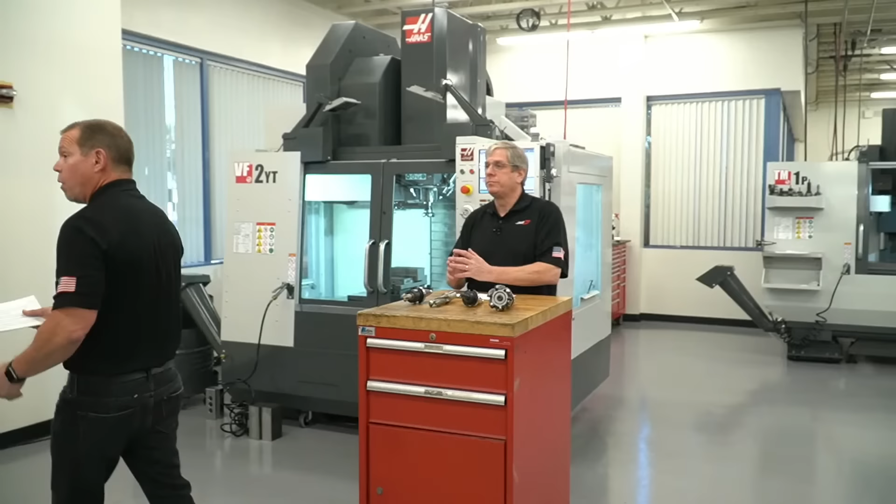Have you watched any demo days? I think you've been in every single one of them. The how a UMC is built one, I wasn't in. Yeah, you missed one.

You've been with Haas for about 20 years, next month 20 years. And 12 of those were in an applications role, for 12 years I was either an applications engineer or managing that applications department.

How many times have you heard people say Haas can't cut steel? Yes, that's how you all sound in my head. We have definitely heard that before. The applications department is responsible for helping Haas customers use their machines, and a lot of people have contacted us about trouble cutting steel on their Haas machine, but it's not because the machine wouldn't cut steel, it's because they weren't running at the correct parameters for that machine. There's a mini mill with a 7.5 horsepower spindle versus this VF2YT with a 30 horsepower spindle. There's a big difference, this has 3 times the torque that machine has. You can't take the same cut in steel on this machine as you can on a mini mill.

It's that simple. And the last demo of the day, we're actually on a 60 horsepower machine, even a step up from here. We were talking a couple weeks ago about a customer that had a 3 or 4 inch shell mill on a tool room mill trying to take a massive cut, and he couldn't figure out why the machine wouldn't do it. You've got to have the right machine for the job.

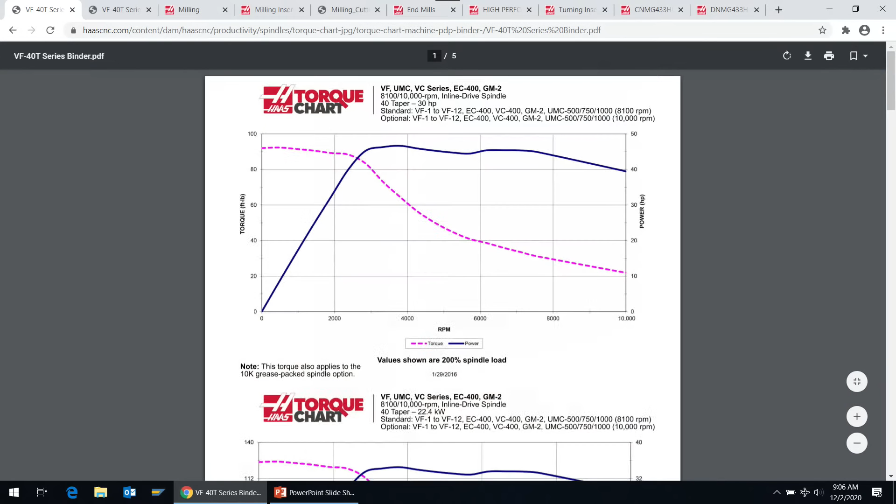They're very easy to see. I've got it pulled up here if you want to take a look at it, Frank. So we've got the VF2YT here, same machine that you guys have got over there. If I page down a little bit and go to the right, I can see this torque chart. I'll just click on that, and there we go. Actually, I'm going to bring up this version here because it's a little blown up. Same chart—here's the torque chart for this particular spindle on this machine.

Along the bottom is the RPM. This is the first thing you need to find on the torque chart—what RPM are you running at? The blue line here is horsepower. At very low RPMs, there's not much horsepower at all, because it doesn't take a lot of power to get the spindle turning at 500 or 1,000 RPM. But what it does take is a lot of torque. So we can take that power we're not using to make the spindle rotate quickly and turn that into torque. We have maximum torque at low RPM, shown by the dotted line up here.

You can see our maximum torque on this particular machine is right about 90 foot-pounds. The foot-pounds are listed on the left-hand side of the chart, the horsepower values are listed down the right side, and along the bottom is RPM. So you find your RPM and see what torque and horsepower you have at that speed. Don't forget to verify the machine models and the spindle type at the top of this torque chart.

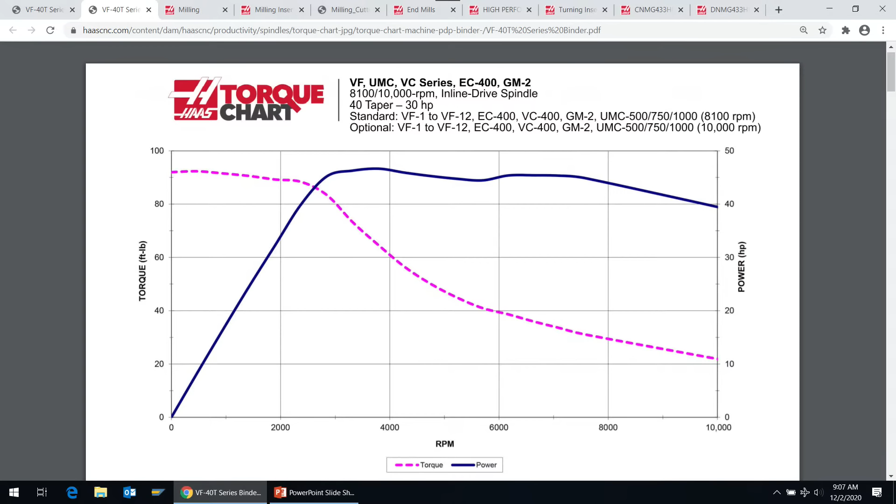On the torque chart for this particular machine, the first chart you'll see is in imperial units, using horsepower and torque in foot-pounds. But if you scroll down one, you'll get the metric version, where we have power in kilowatts and torque measured in Newton meters. So that's the difference between those.

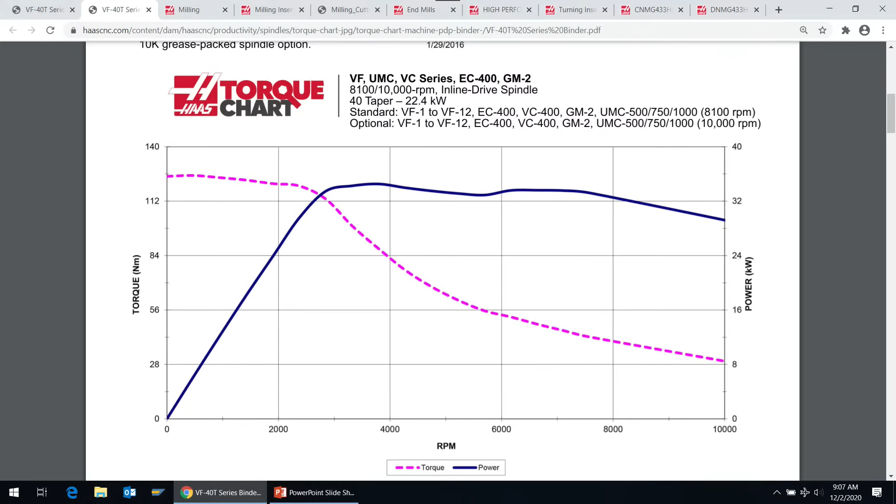If you go down again, you'll see the torque chart for this machine with a gearbox. We have two sets of torque and horsepower lines here—one set is the low gear values, the other set is the high gear values, and you can see where the shift point is. If you're really doing heavy cutting, you may want to consider a gearbox machine, because you can see you've more than doubled your torque at low RPM. This machine without the gearbox is 90 foot-pounds of torque peak, and this machine is 250 foot-pounds of torque—quite a bit more.

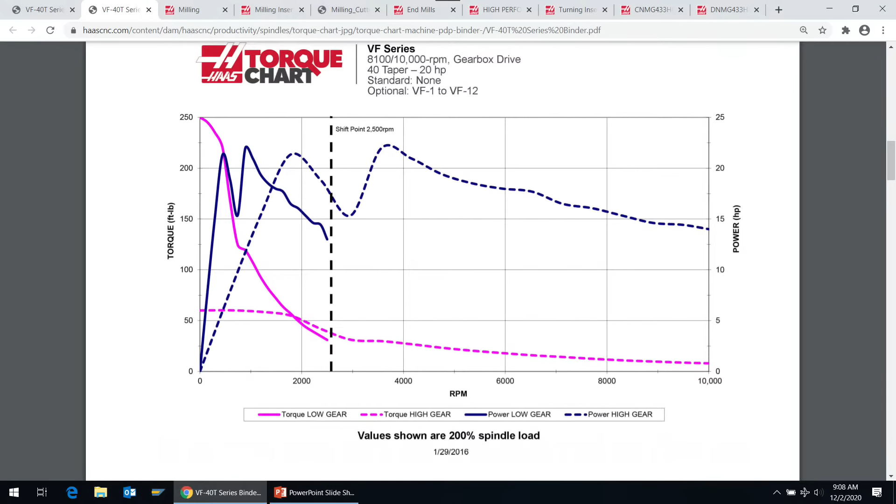If you're cutting hardened materials, tough materials like stainless steels or titanium, you definitely want a gearbox machine. It doesn't mean you can't cut those materials without a gearbox, just that you can't cut them as efficiently. After our demonstration, we're going to measure the spindle load values of each of the cutters, and then go back to the torque chart to show you how those values relate to the torque and horsepower curves.

The other thing we're going to do is go through each tool. Each of these tools is from HaasTooling.com. So we're going to talk about feeds and speeds. Andrew, do you mind pulling up HaasTooling.com?

From the website, if I go over to the right side of the screen and hover over Haas Tooling, this gives access to all the various menus for the different kinds of tooling that we sell. I've already clicked on the milling section, and I can see milling bodies, inserts, end mills, all that sort of stuff. I've got another tab open.

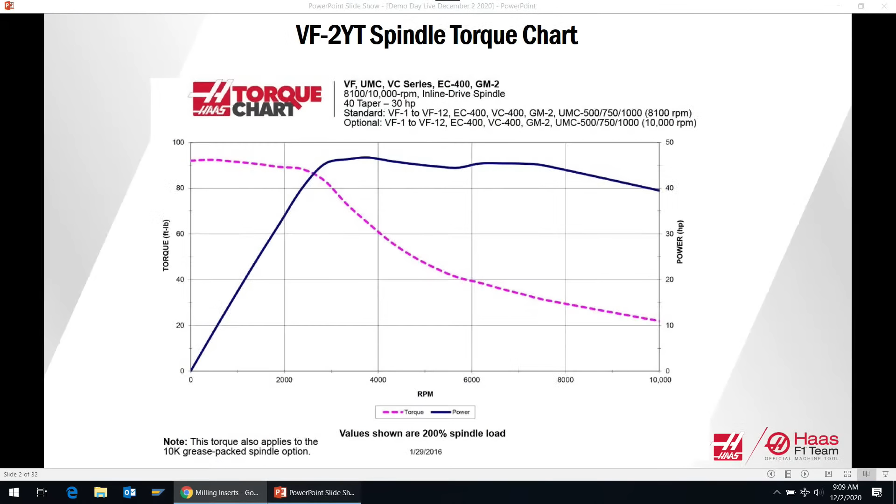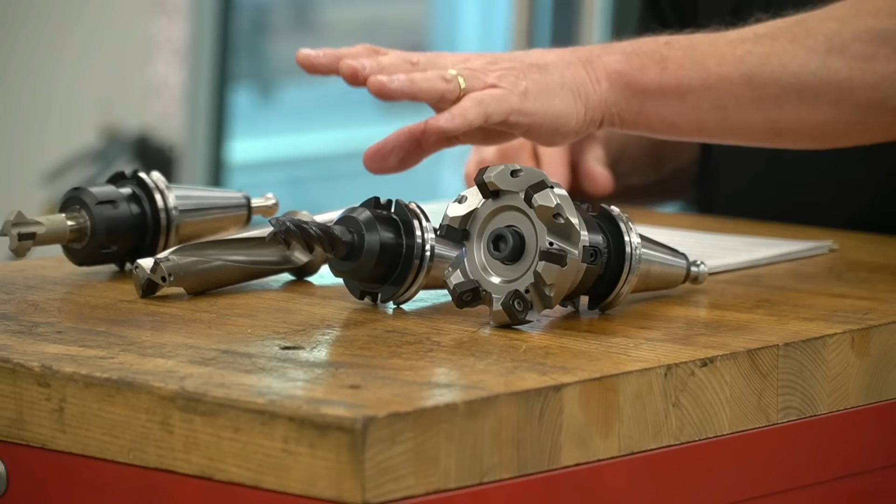You can see I'm cutting an alloy steel here. I'm using the HMP 35 inserts, which are the preferred grade for steel. I've programmed it at 850 surface feet, right in the middle for a spindle speed, and the feed per tooth is just under 10 thousandths, again right in the middle of the recommendation. The point is to show you that if you get these tools from HaasTooling.com and plug in the numbers, if you got all the parameters right, you're going to be right in the ballpark. You'll be able to make those cuts, assuming you've got the torque required.

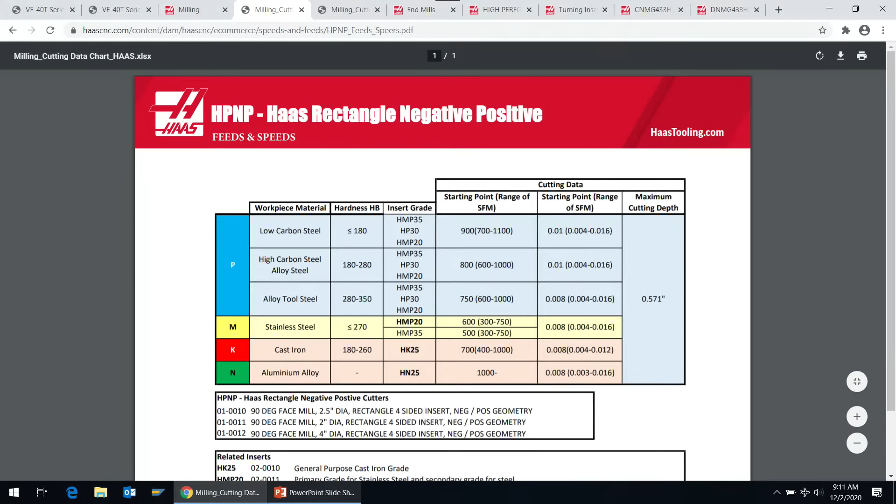So here's the insert page, and down here you can see technical specs and stuff like that. But what I want is the speed and feed—it's kind of hidden away here. If I click on this, it brings us to the same chart that John was just showing, except John's version is highlighted with the actual values he's using. You can see it's just a couple clicks away to get the information you need.

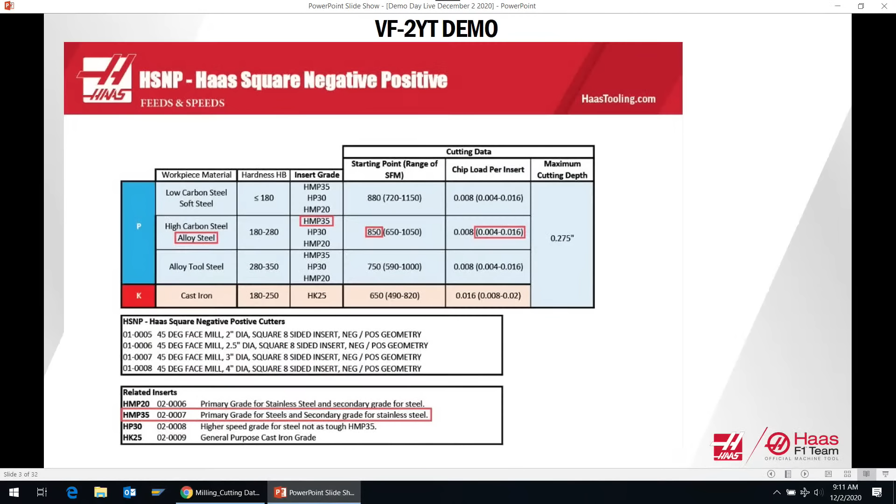Okay, back to you, John. So the second tool in this program is the 3/4 inch 4-flute end mill. This is the standard length end mill, 4 flutes. The surface footage I programmed is 575 surface feet and 4.4 thousandths feed per tooth. On the depth of cut, we're going nice and deep at 1.5 times diameter, and I'll talk more about that when the actual tool is running.

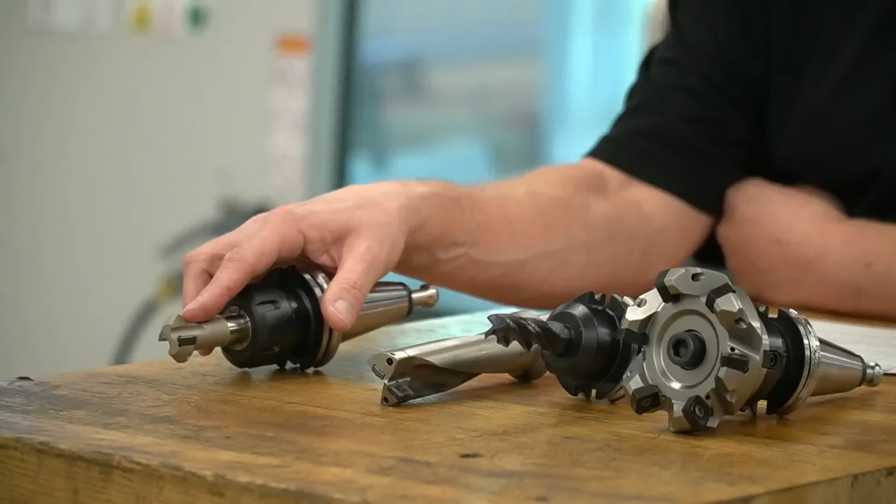The third tool in my program is the drill. This is a 1.25 inch inserted drill. We're using TSC on this one. We programmed that right at 540 surface feet per minute, feeding at 6.1 thousandths per revolution. The last tool is the chamfer tool. I've got the 2-flute 45-degree chamfer tool here. This one's programmed at 800 surface feet, quite a bit faster. It's taking a much smaller cut, and we've got 7.5 thousandths feed per tooth for those 2 teeth, just to put a 50 thousandths chamfer on all the sharp edges on this demo program.

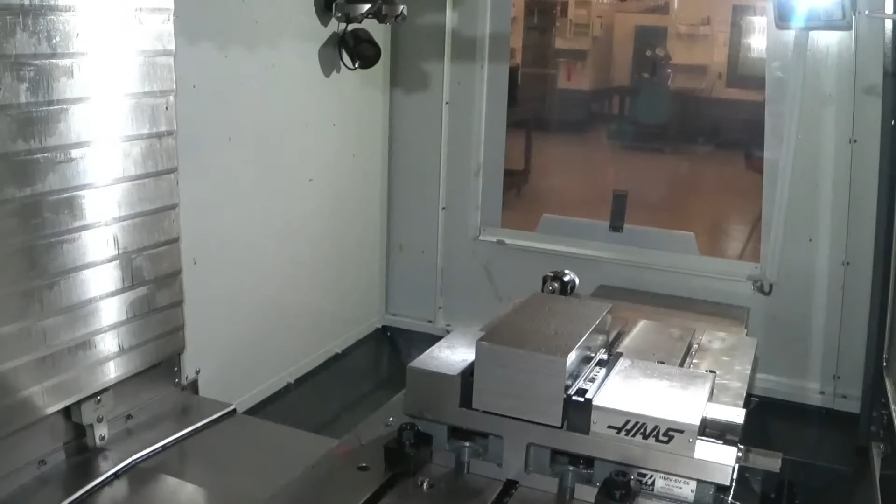Okay, are we ready for the demo? I think we are. Tyler, you want to come in and we'll get you in here tight? We've got a camera inside the machine. I'll mention one thing real quick: in the demo program, I used a macro statement to zero out the spindle load meters for each tool before they run, and it records the maximum spindle load that tool achieved during the cut. All of that information is being printed to a file, and we can take a quick look at that at the end of the demo, then relate that spindle load information to the torque chart next.

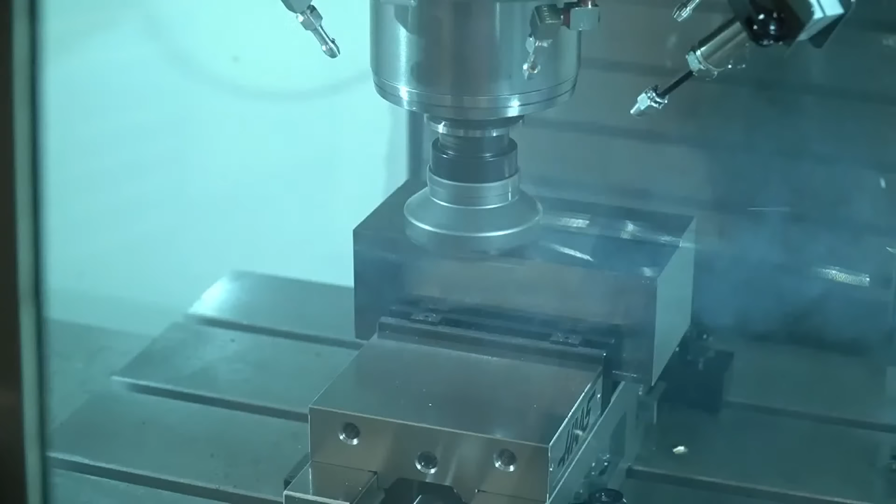This cutter's coming in. It's taking 150 thousandths depth of cut and a 2-inch width of cut. My spindle load meter is hovering around 130.

You can see the chips coming off are nice straw colored, and as they hit the pan, they turn a little bit blue. That means we're cutting just perfectly.

Here's the end mill. This is a 1.5 times diameter deep, so 1 inch, 125 deep. And I'm taking 33% of the diameter as width of cut, which is 250 thousandths on that 3/4 inch end mill. So 1 inch, 125 deep, and 250 width of cut. We'll take a couple of cuts.

Again, you can see the chips are coming off straw colored or a little bit blue, and when they hit the pan they turn real blue. That means all the heat in the cut is coming out in the chip. This thing's cutting really well.

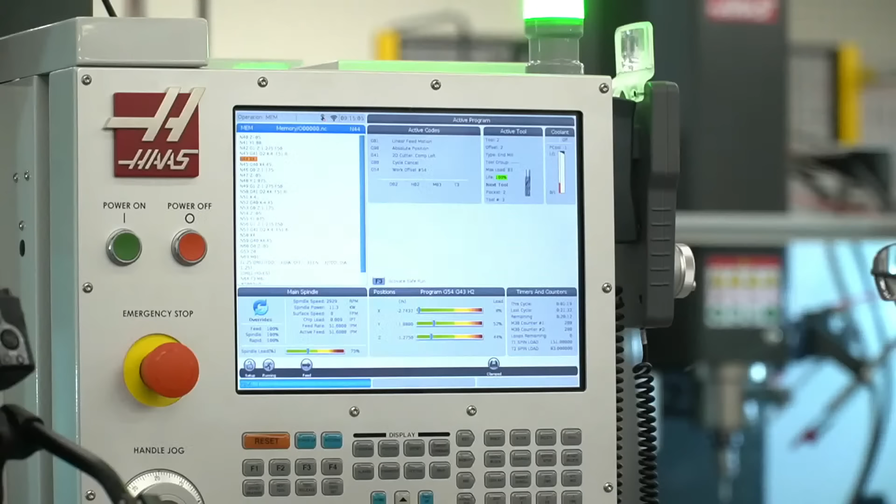And what kind of spindle loads do we have? Spindle load is 75%. Okay, so you've got some room if you want to push it a little bit. I could increase my width of cut and take a bigger spindle load because I've got the headroom there. Let's do a little cleanup pass here just to make it look nice.

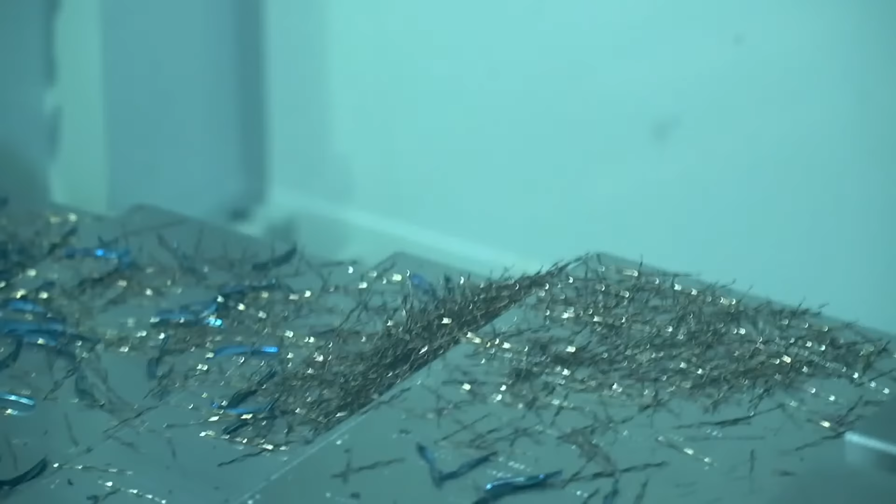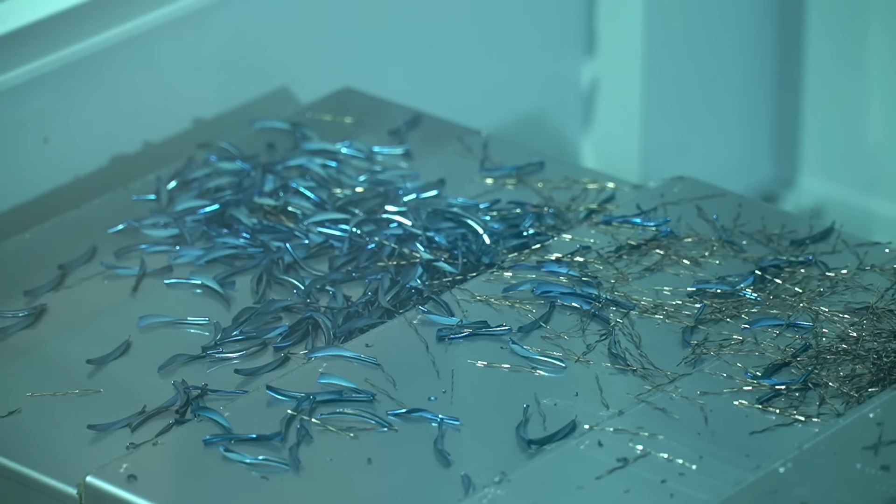I was wondering if you could get a shot of the chips over there on the way cover. I'll feed hold this. You can see the color of the chips, how they're nice and blue. The thinner chips, which didn't carry as much heat out, are straw colored, and then the bigger, thicker chips have turned blue because all the heat in the cut has come out in that chip and not in the workpiece or the material. Okay, I'm going to focus back on our part and I'll continue.

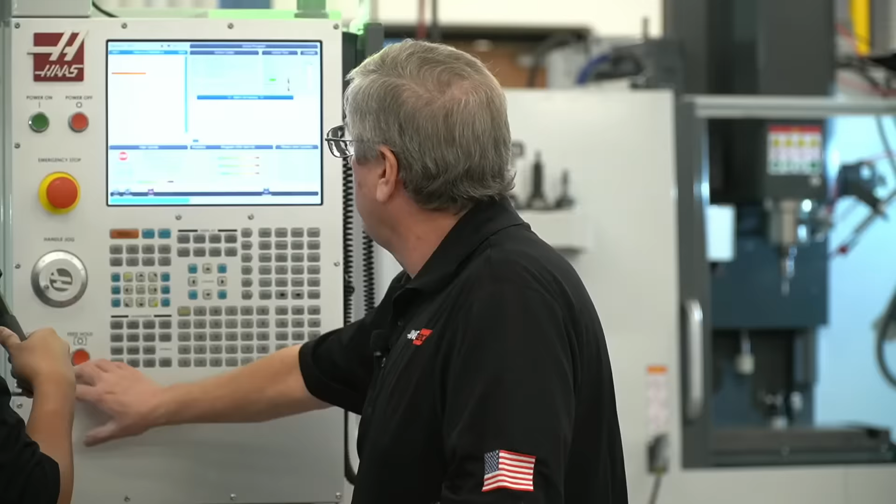So that's a 1¼ inch inserted drill going through 3 inches of material. My spindle load is 95%. It's fluctuating a tiny bit right around there, but that's perfect. Right at 100%, 110%, 120%. We can do that all day long with that tool.

And you definitely want through spindle coolant with this tool. You've got to get those chips out of there. Yeah, definitely. Unless you're doing a very shallow hole, you've got to have through spindle coolant with these insert drills.

We'll toss 3 holes in there. So one of the things we talked about was spindle load, and you say you feel comfortable running that all day long. It's always a balance, right, between tool life and how fast you're removing material?

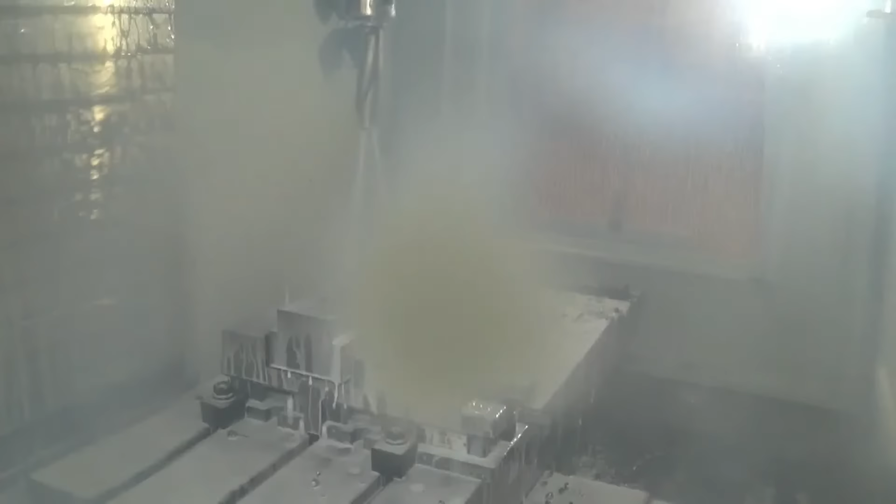Yeah, absolutely. So with regard to spindle load, the vector drive on Haas machines will allow you to run below 150% continuously, all day long in that cut. At 150%, we can go continuous for about 30 minutes before we run into trouble with maybe overheating the spindle motor. And even if you bury this thing at 200% spindle load, you've still got about 3 minutes of cut time to get away with it. So there's still plenty of headroom utilizing the vector drive in our machines.

But at some point, you're going to be compromising tool life, right? Yes, absolutely. You don't want to push things too hard, not because the machine can't take it, but because the tooling can't take it. The last thing you want, if you make parts for a living, is a catastrophic tool failure because you lose the tool, you lose the part, it's a mess.

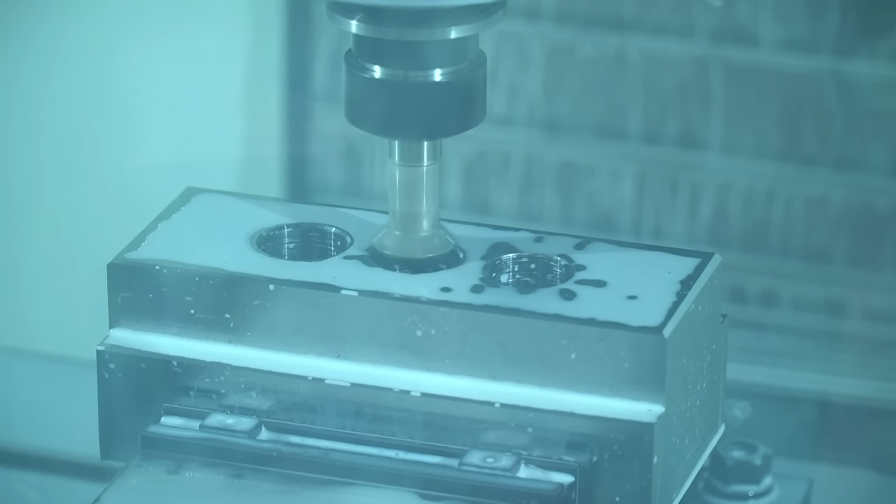And so reasonable spindle loads for your cut and your tooling, in my opinion, hover around 100, 125%. I wouldn't try to go too much more than that on a regular basis. Backing off of there is definitely going to give you longer tool life. And it's not that it injures the machine or anything, it's more about the tooling.

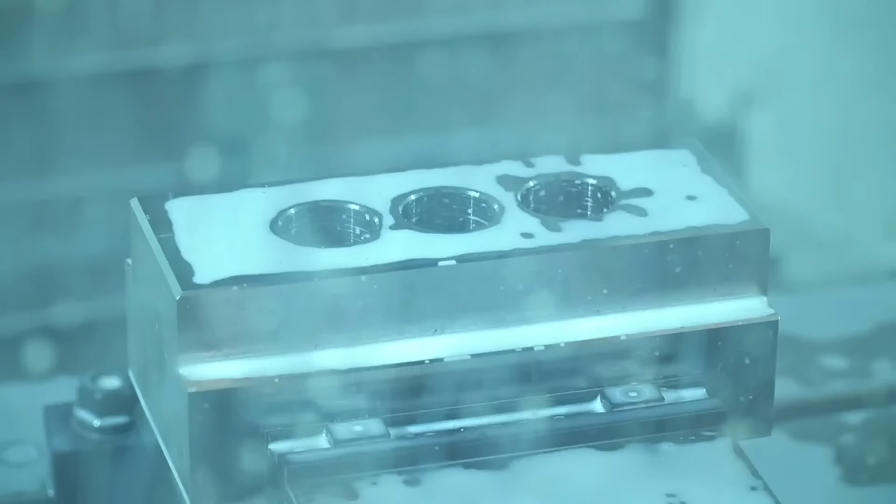That's right. When I used to, in my previous role here, go to a lot of customer shops, guys would be running their machines at 30, 40% spindle load, thinking that was going to make them last longer. And yeah, it probably did, but you're leaving money on the table for sure. The extra cycle time it takes to machine at those lower spindle loads is costing you money. Exactly, for sure.

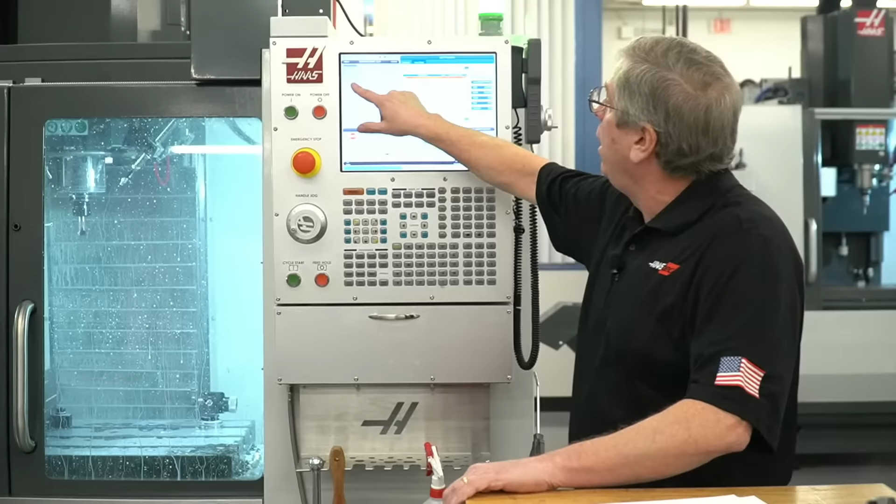So I wanted to take a quick look. I'll show you the DPRNT file here that I created. So at the end of this program, I wrote the maximum spindle load recorded by each tool.

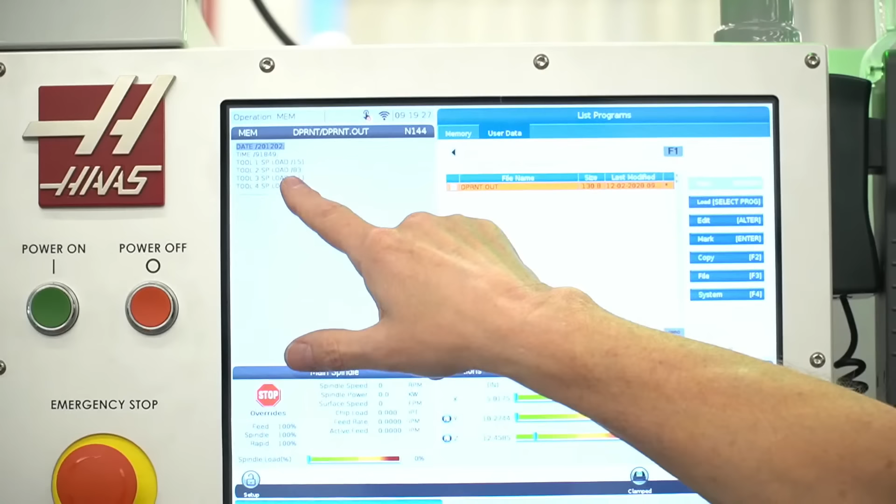Tool 1 had a maximum load of 151%. Tool 2, which was the 3/4 inch end mill, did 83% at a maximum. The drill was 111%, and our chamfer tool was only 5% spindle load. So you get an idea of where those loads came out, right? 150 for the face mill, 83, 85 for the end mill, and then 111 for the drill.

Now let's pull up the torque charts and see how that information jives. Let me scoot over here just a little bit.

When we were preparing here, I recorded 155% spindle load on that face mill the first time through. You can see that the maximum torque is up here at 90, and that's 200% spindle load. The values shown for horsepower and for torque are at 200% of the load of the spindle motor.

So our cut was 155% of that spindle load. When I take 155 and divide it by 200, I get 0.775, 77.5%. That's my conversion factor. So at the RPM I was running, 1,082, I have right at 90 foot-pounds of torque. So 90 times 0.775 gives me 70 foot-pounds of torque. That's the torque value that I pulled, 70 foot-pounds at 155% spindle load.

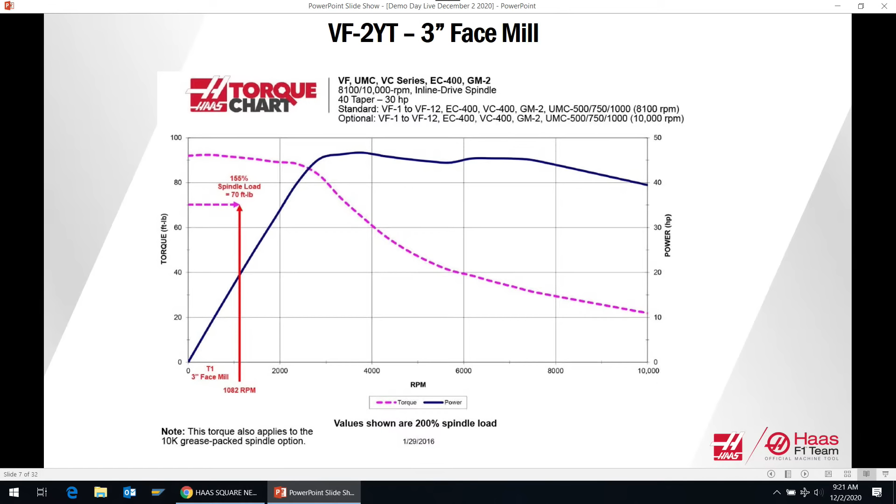Now let's pull up the next chart. This is the 3/4 inch end mill, running at 2,929 RPM. My torque value is a lot lower here because the chart has come down, so at this RPM I have less available torque. I pulled 84% spindle load and did the math on that, and that showed me that end mill was requiring 35 foot-pounds of torque, and this is where that 35 foot-pounds falls in. Remember, this is my maximum, not that, when I'm making this calculation.

And then the last tool. So you actually, in this case, had quite a bit of headroom in terms of running that tool harder, but you probably don't want to run it that much harder.

Right. In that case, I was taking 250 thousandths width of cut and 1.5 times diameter deep. I would ease that width of cut in if I needed to remove more stock per cut. That's how I would utilize the available spindle load that I have on that tool, and I'm probably not going to harm that tool or cut its life down at all by increasing that width of cut.

When we were preparing for this, you were talking about how one of the things you like to do, if you're unsure about what spindle load you want to use, is start light and then see where that puts you, and then do the calculation.

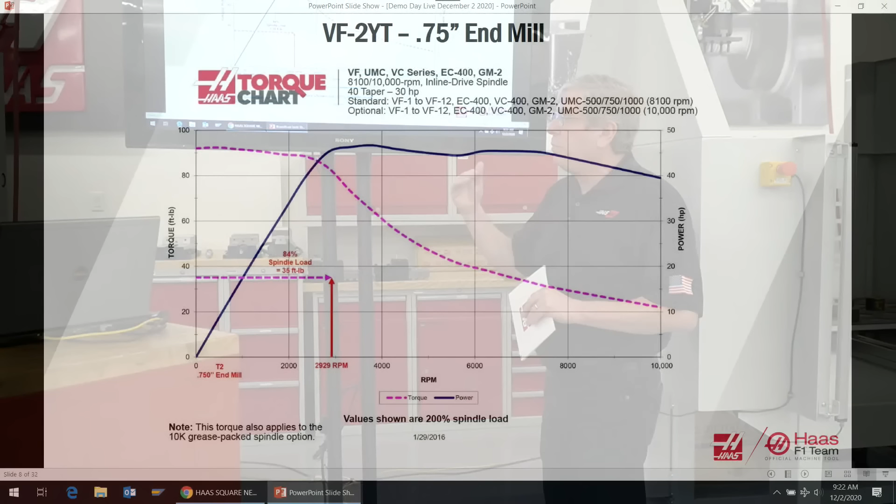Yeah, absolutely. So the way I would approach it if I was unsure about the cut I wanted to take, I would get the speed and feed information for the cutting tool and use that right in the middle of the speed and right in the middle of the feed rate information, and then go ahead and take a light depth of cut. Set up your cut with the width you want, but take a lighter depth.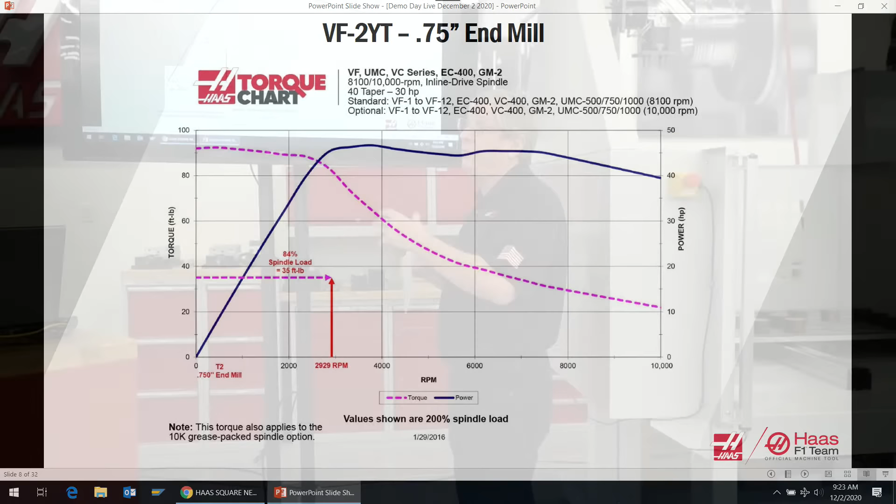For example, let's say you took that light depth of cut and you had a 50% spindle load. Well, if you change one cutting parameter, like depth of cut only, you can double that depth of cut and your spindle load is going to double. So you go from 50% spindle load up to 100, so you can take that cut twice. You take twice the original cut, you're going to double the cut, it'll double the spindle load on you.

So that's how taking a light cut, monitoring the spindle load and seeing how much available torque or headroom you've got on spindle power, and then go from there as far as adjusting and optimizing your cutting parameters. But definitely go with the recommended speed and feed and adjust your cut parameters as far as depth or width of cut.

Right. It's just a practical, empirical way to quickly get to a good value without maybe doing some involved power calculation or something. You just start off at the recommended values and change depth of cut.

There's also milling and turning calculators on the control where you can punch in your numbers and it'll give you a rough value for required power based on what material you choose on that calculator.

Right, okay, so third tool. The third tool here was the drill. We can see that was running at 1,650 RPM, where we're back up in our maximum torque range, but we pulled 110% spindle load. 110% divided by 200 gives me my percentage, which I multiplied by the 90 foot-pounds, and the percentage was 0.55.

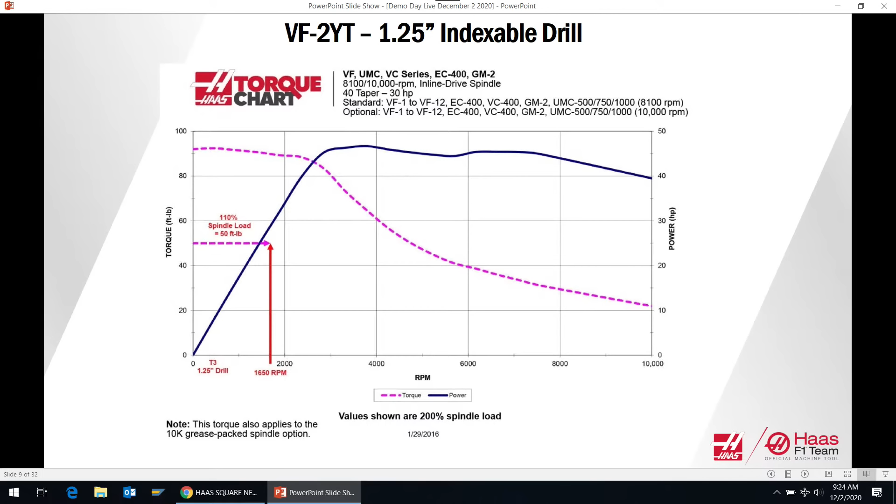So 55% of 90 foot-pounds of torque is 50 foot-pounds of torque. That's what that cut pulled, and I was definitely right in the sweet spot for that tool at 100%, 110% spindle load. That's how you translate the spindle load numbers to the torque chart and figure it out. You have the spindle load information from the machine, and you have the tooling information on the website or wherever you're getting your tooling, and it's easy to get started.

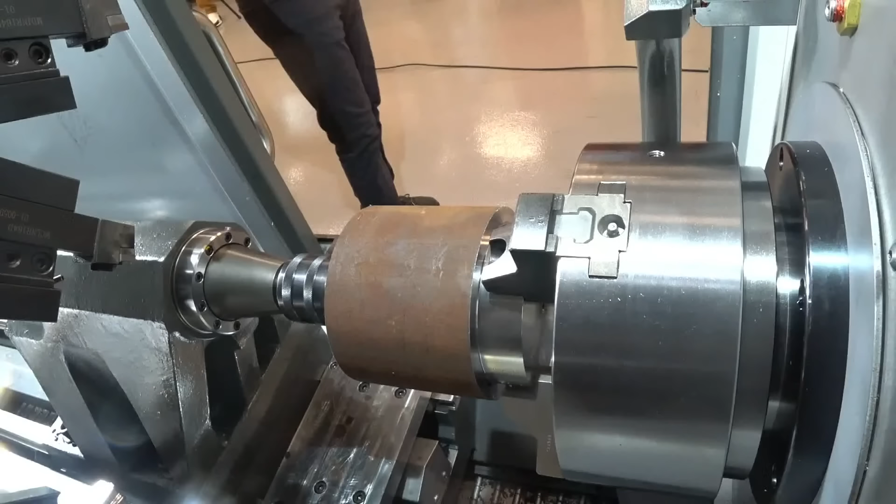Okay, so on the ST30LY we're going to go from milling to turning. Talk a little bit about what you're making. Before I do, just so you know, at Haas all the lathes are running steel about 80% of the time, so it's nothing new to us, we do it all the time over here, mill spindle shafts and lathe spindle shafts. You've been at Haas for how long? 20 years, 15 years as a machine shop supervisor, so you supervised the machine shop and specialized in turning. Exactly, so if anybody knows how much steel we turn here at Haas, it's this guy. Yeah, it's all steel for lathes.

Okay, so we're running 4140. We're doing some simple turning, the blueprints come up on the screen. You want to look, Frank, want me to change over the first tool? Let's go to the first tool. Simple, on the top left it's showing the tooling path, real simple.

And we're using a CNMG 433 insert. Now the most common roughing insert in the world is probably the CNMG 432. We're just going with a bigger radius because I really want to push this insert, show it off. It's an HRH, which is a Haas Roughing Heavy insert. It might not be available yet online. On the website, the turning inserts and turning tools are just another page here on the Haas tooling part of the site.

But yeah, this is an example of a similar insert. I think the ones you're using are going to be on there next week or something. Well, if it fails now, we might not even go on. You never know, we'll see. Yeah, HRH, I'm really comfortable with it, it's an awesome insert. We only just got it in, so that's why it's not released yet. So we're going to go with that and push this first tool.

We've got 3 tools coming. Do you want to talk about the loads first, or after? Let's talk about it now. The depth of cut I'm going at, if you look at the top right graph, it shows the feed rate increasing. The bottom scale is the feed rate increasing left to right, and the depth of cut is increasing from bottom to top. The red ring shows where I'm cutting this, and it's at the extreme end of this insert.

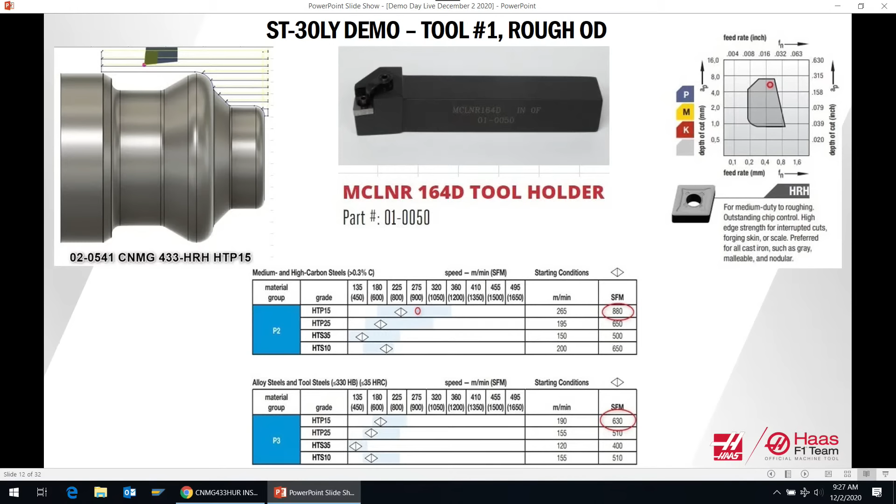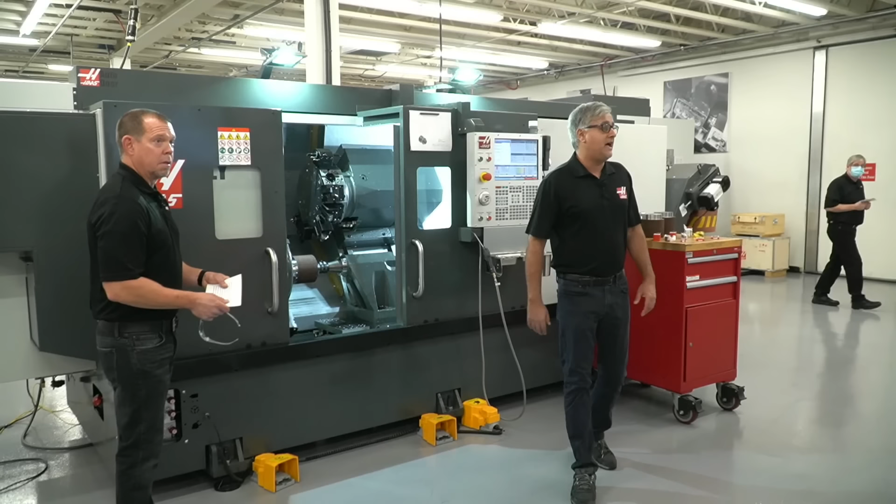So we're cutting, you're definitely pushing this hard. We're at 200 thou depth of cut, probably 18 thou feed, and the spindle speed recommended for 4140, which is an alloy steel, the bottom graph shows it's 630. We're actually going to go with a high carbon, we're going to go with 880, so we're pushing this beyond what you're supposed to, just to see some really good chunky chips basically. All right, let's do it.

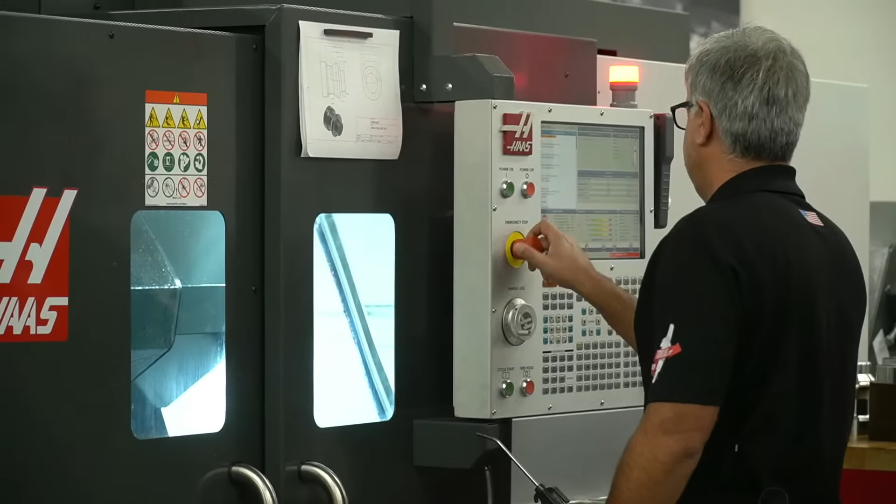Sal, you want to come in here before he starts? Yeah, before you press go, let's make sure. You've got that action cam, but I think Sal's shot is going to be the best here.

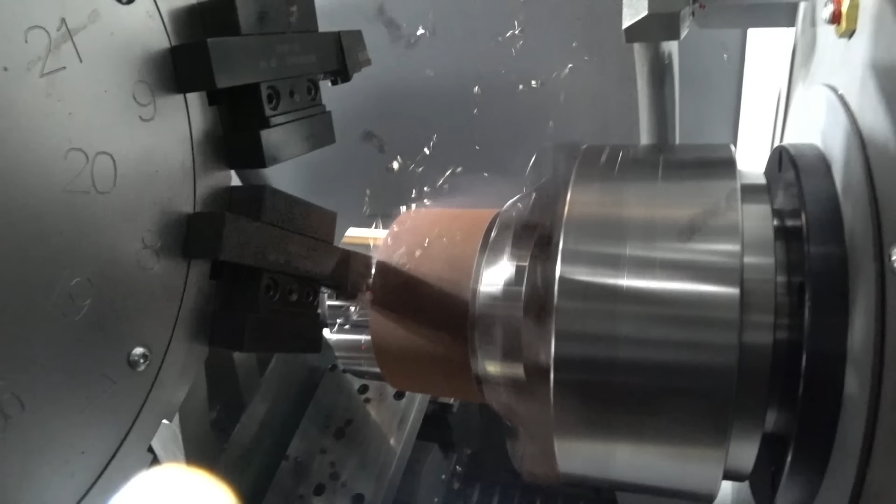Yeah, I agree. 6 1/8 inch diameter material, it's 4140 like I said. The spindle load you can see is at 165. So really, you want to be at 120 to 140, then you could run all day. We're just pushing it a little bit more just for this demonstration.

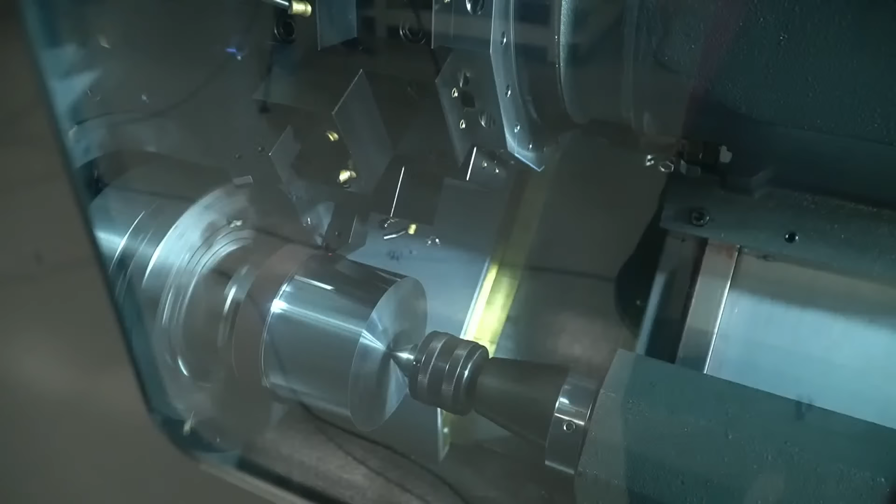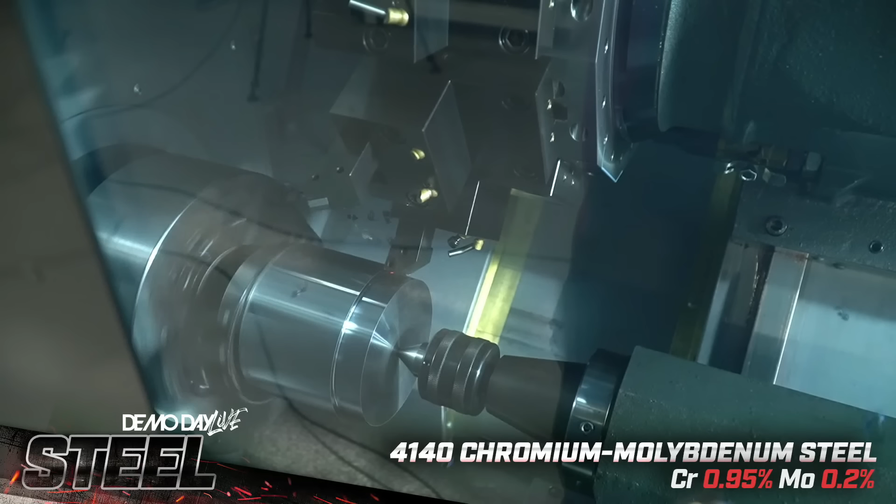Sal, can you close in on the insert? It should be glowing red - that's the heat dissipating from the insert as it falls to the ground. Most of the energy is being absorbed by the chip or swarf. I'd say 70% goes to the chip, 20% to the insert, and about 10% to the part.

Real nice, juicy cuts - nice popcorn sound coming out.

Just doing the final profile now. The last pass is coming.

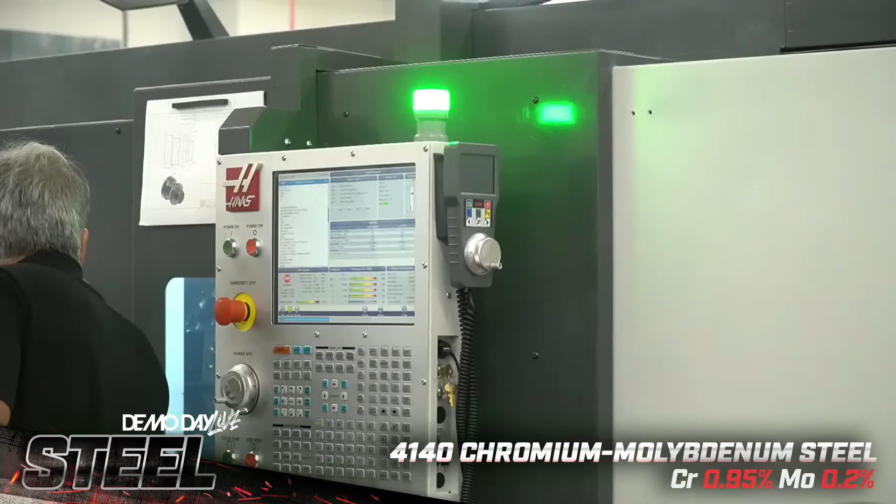Okay Sal, that took just over 2 minutes. If you want to get out of the way, I'll open the door to let Brian see. Now if we open that up, there's a lot of heat there, but go ahead and touch the part - trust me. Is this a setup? Nice and cool, nice and cool.

Most of the heat is down there on the insert, the material is kind of cool. That's exactly what should happen, that's how it should go.

The next tool we're going to run is the DNMG. Let's pull that up and go to the next one here. The next tool is going to rough the profile - that's a DNMG 433, the same HRH insert we got for the CNMG.

I'm just removing these - maybe we can give those away at the end. Get those out of the way, just for the demonstration. Not souvenirs though - if it was a real trade show, people would want to take those home. They'd be lined up to cut their hands on the way out.

The reason I'm using the DNMG is because we're doing a 30 thou relief, and the DNMGs have got 32 degrees clearance, so we can plunge in there.

Can you push it again? We're fully doing a roughing pass - it's still got better roughing relief, but I've backed it off a little bit because this is a 55-degree insert.

If you look at the graph on the top right, it's showing we're going about 160 thou depth of cut and 16 thou feed. The speed is actually above recommendation - it's at 850, so we're pushing this insert as well.

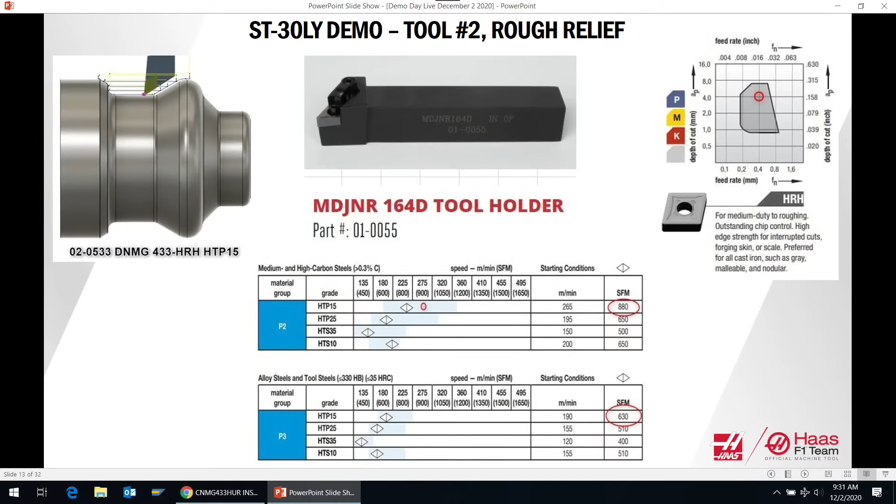Are you pushing this one about as hard as the first one? Yeah, the load's going to be less - we're going a little bit less on the depth of cut, so the load should be less.

You want Sal to get in there? Yes, Sal, come on in - all right, let's get in here. It's what everybody wants to see.

Same thing, insert's glowing. First pass isn't as deep as the rest, so on the next plunge you'll see the insert really working, really doing its job.

So shall we go ahead and run the final pass, which is the finished profile. There it is - it's just relieved the little diameter there, so we can go in with a finish tool, which is our VBMT, the third and final tool. It's just going to do the profile. Usually you'd use a VNMG, which is a negative tool, but because I'm doing a profile that goes around a radius and uses the back of the insert, I'm going with a VBMT for chip control.

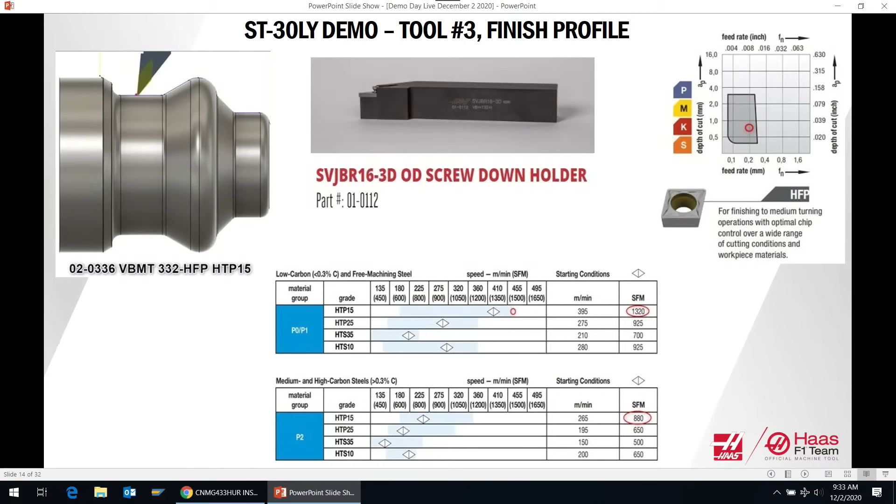All right, let's do it. Come back in Sal, making you go back and forth constantly. Door lock.

I can smell the steel. Oh, the door's not locking - hold on. I think we've put too many chips in there, mate. You're not supposed to open it until the program's done, Bob. Yeah, there we go.

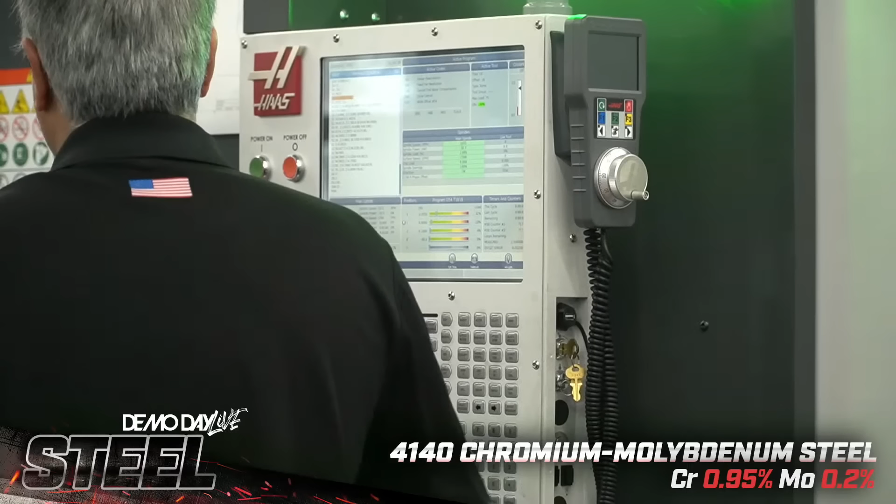That's going 1200 RPM on the surface speed. Going around the profile, nice chips. Just going over the top, and that's it.

Didn't touch the diameter - I think I changed my offset there, but not to worry. That's all done.

Good finished part, and you can see that finish insert is a little bit cooler because the insert's not doing its job as much - it's not as hot as the roughers.

Okay, so we can show you those chips - there's chips steaming. Oh yeah, there's chunky chips right there. How do I know they're hot, Bob? Well, let's turn the coolant on and see what goes on here. Sal, you want to jump in here and get this? This is how you know the chips are hot.

Now they're steaming. If I stop that and open the door a little bit, you'll hear them all sizzling in there.

That's a great demo. Where's our mist extractor? Cool, alright, thanks Bob.

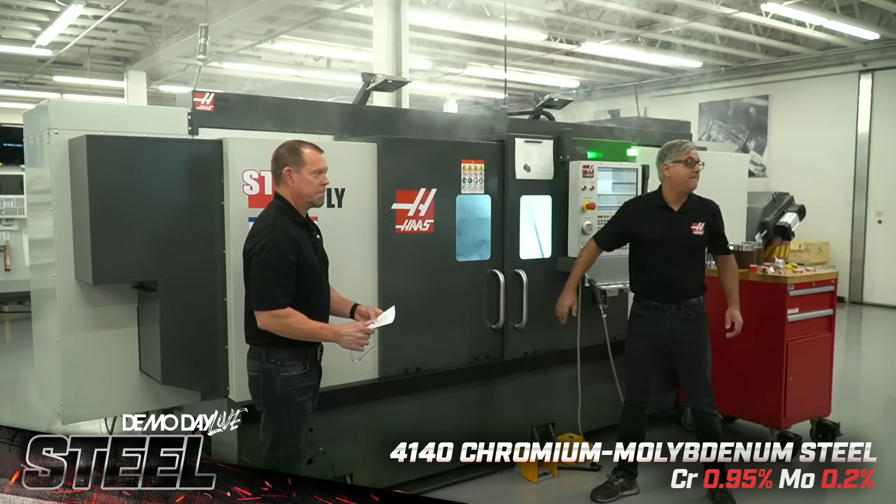Okay, so now we're going to move on and take a look at some of the tool testing data we covered before. Bob's been in charge of testing all the tools for HaasTooling.com on the turning side, and John Nelson's done the milling side. We've got a presentation up so you can talk about what your criteria was as you tested all these tools.

Pretty much all the information John was doing, I was capturing the same style for the lathe. So depth of cuts, the speeds and feeds, what material we were using, what was the spindle load, what was the material removal rate. All that information was gathered for a lot of inserts that are on the website right now with lots of different materials.

We tested stainless for the first time ever, and that's the first time I've done that in a long time, because we cut very little stainless here. So we tested stainless, cast iron, regular steel, high alloy steel, and heat treat materials. We test a lot of inserts, and this is the data we came up with.

Yeah, so you have tons of data points, of course. There's pages and pages of print information that gets put onto the USB, and then we load all that information and save it for future use.

And then continuing, we record what kind of chips we were getting as well. Like in the case of this machine here, you were cutting these number 4 C's, that was good machinability, so you get nice C-shaped chips.

I like the number 2s and 3s, a bit more of a tight chip. Is that maybe because you're pushing it a little bit extra hard here? The material's got good machinability properties, so it chipped really well, and we were pushing it a little bit more than we should have been.

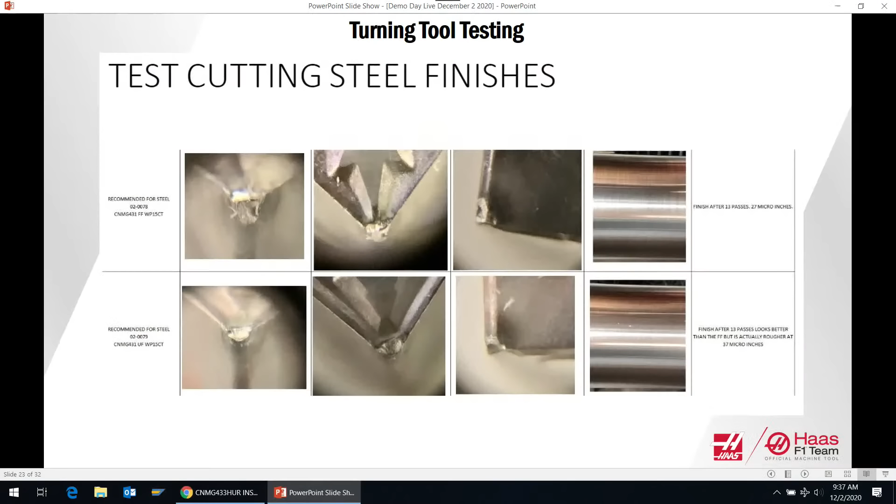Cool, so then steel finishes. Alright, well I guess that kind of wraps that up.

Thank you, thanks, that was an impressive demo. Thank you so much, Bob. I'm going to go just...

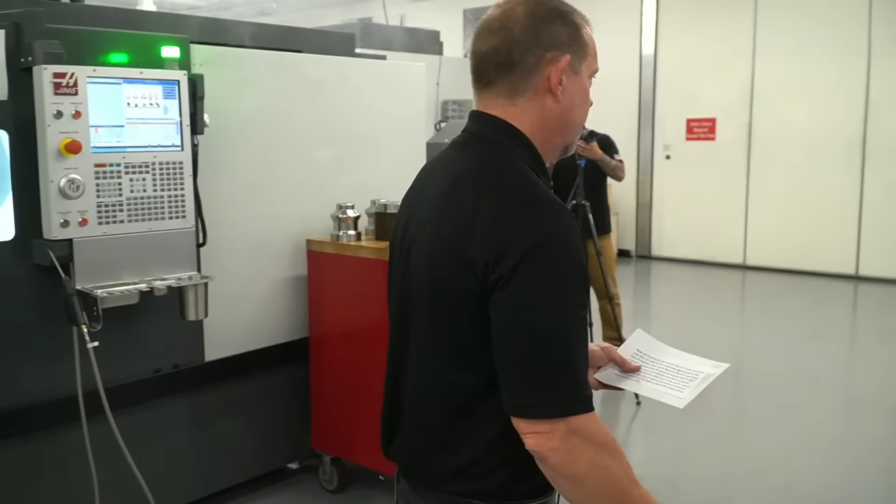Alright, so now we're going to jump over to the VF3 YT50 over here, and Brian and John are going to resume. We're back with John.

VF3 YT50, this is a 50 taper. A lot more, we've been talking about horsepower and torque, and we've got more of both on this machine. This is the 50 taper high performance spindle, it's got a maximum peak of 60 horsepower, a 2-speed gearbox in it. All the 50 tapers have gearboxes, but this has the additional higher horsepower motor in it.

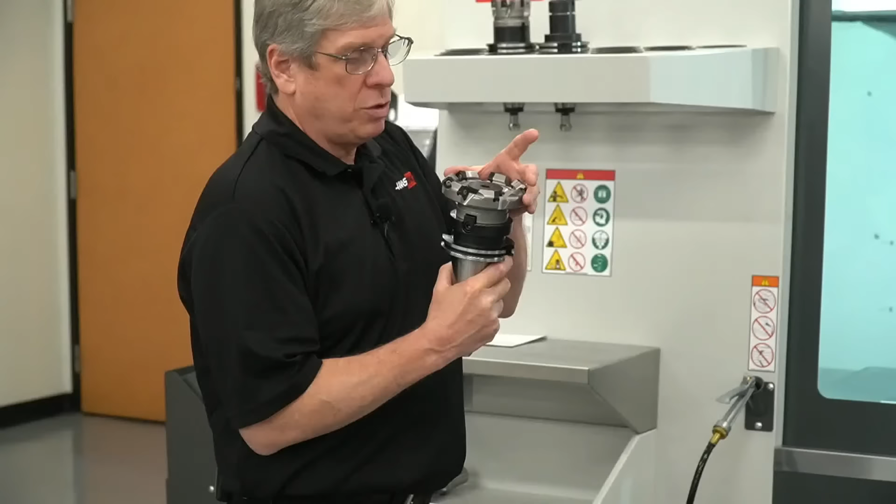Set up a very similar demo, again it's 4130 low alloy steel. The cutting tools used in this demonstration, I'm basically using the same cutter that we had in that VF2, except this is the 4-inch version, so it's 1 inch larger in diameter. When you step up to the 4-inch, this is a 7-flute cutter, so we're using the same insert on that.

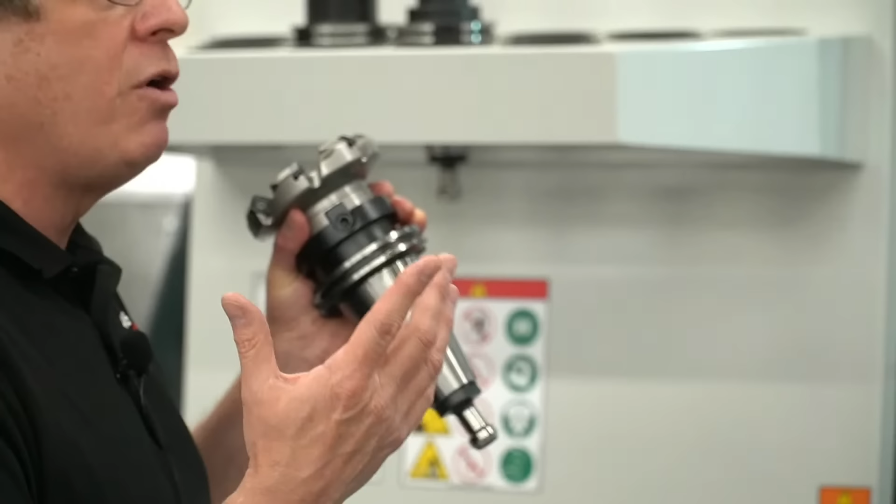I programmed the same surface footage, 850, as well as the same feed per tooth, which is 9 thousandths and 8 tenths, a hair under 10 thousandths feed per tooth. The second tool in this is going to be the 3-inch 90-degree shell mill.

This 3-inch version is a 6-flute cutter. It uses the same grade of inserts, obviously a different style - those are the 45s, these are the 90s. But as far as surface footage and feed per tooth, exactly the same as that previous cutter: 850 SFM and just a hair under 10 thou feed per tooth. This cutter is going to go 325 thousandths deep.

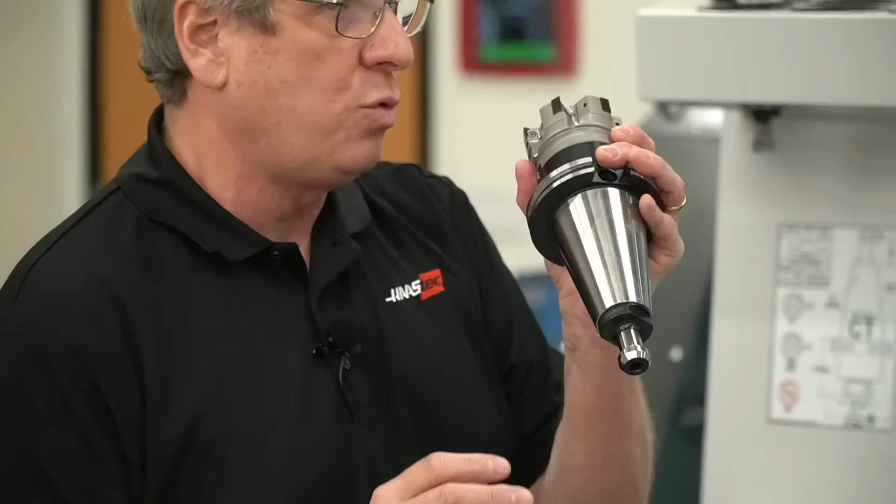On this one with a 4-inch face mill, how deep are you going on the width? The face mill is going to be 220 thousandths deep and 3-inch wide width of cut with the 4-inch cutter. So 3/4 of the width and 220 thousandths deep.

The third cutter in this demonstration is the 1.5-inch insert drill. We're going to pop a couple of holes with that baby, programmed at 600 surface feet and about 6.5 thou per revolution in that same steel.

And then the last tool is a 45-degree chamfer mill. This is the 3-flute version, programmed at 800 surface feet and 7.5 thou feed per tooth. Okay, I think we're ready to go.

Why don't you hit cycle start over there? You're going to let me do this? Who are we going to get in here? Is Sal going to do it? Oh, you're going to come in, right, Tyler? Get Tyler in here for this. I think I can let an engineer push cycle start - I can always blame you, you programmed it. All right, you ready to go, Tyler? All right, let's do it.

I did the same thing, recording the spindle load of each of these tools. Oh, you can see better than I. What do you have over there on the spindle load? Right around 100%, just under.

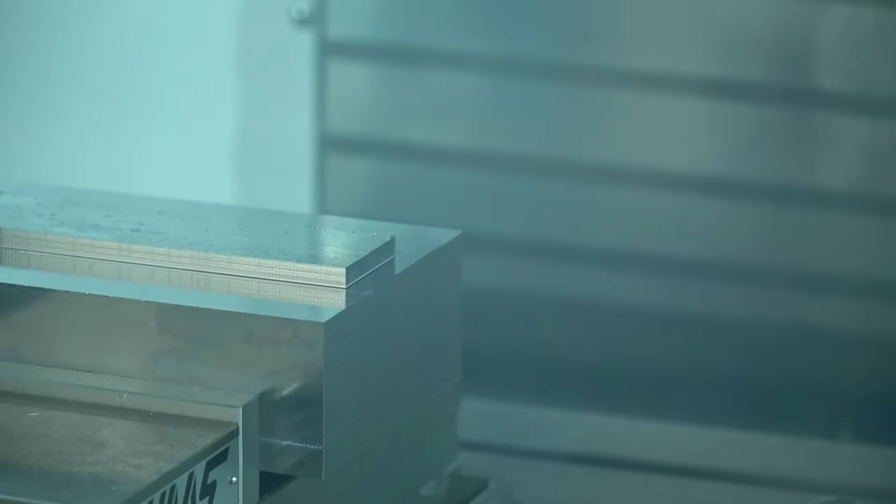Sorry about that, folks. One too many practice runs on that insert. Yeah, didn't do that in any of our practice runs. Apologize for that.

There's our 1.5 inch diameter drill. And that spindle load is under 60%, so you could push that a little more if you were so inclined.

Yeah, with this drill, I wouldn't increase the spindle speed as much as I would push the feed rate a little harder.

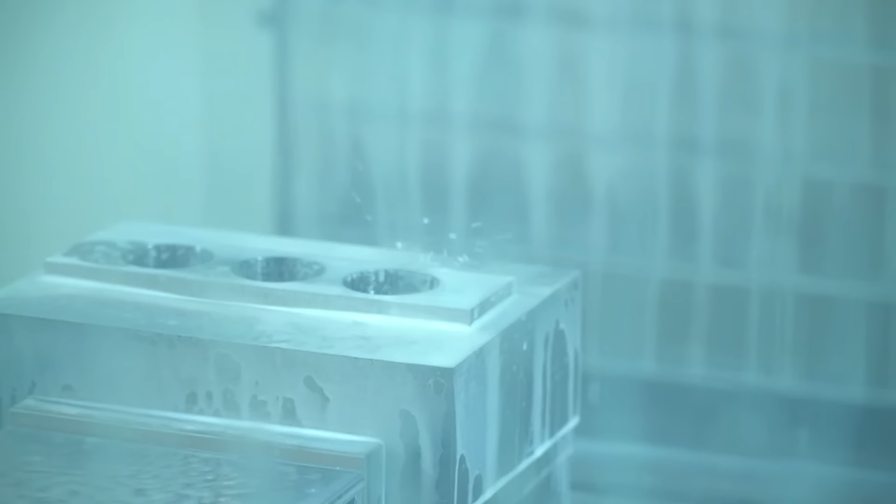There's our 3 holes, and then we'll come in with the chamfer tool and hit the sharp edges here, clean it all up. And of course, this is minimum spindle load, taking almost no material, just taking the sharp edges off.

I think what we'll do when this tool's finished, maybe we'll grab some chips. You've been talking about how they're straw colored when they come off the tool, and then the color that you like to see at the end. Maybe I'll scoop some out of there and we'll get a close-up of them.

This whole room's got that smell of steel. I love the smell of steel in the morning. Yeah, there's definitely a unique odor when steel gets cut. Yes.

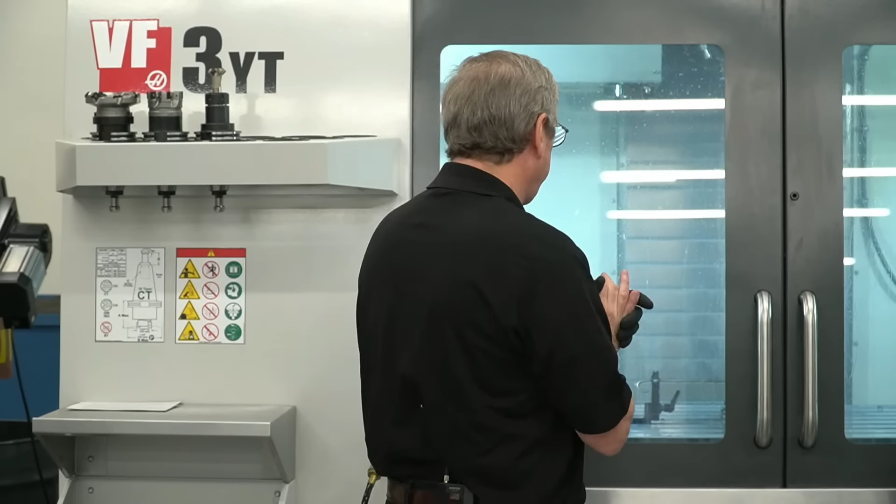Okay, that's right, we can open the doors. Tyler can get a good shot of the finished part there and all the smoke. And you want to grab some chips? Yeah, absolutely. Let's see - Tyler, maybe just hang out here and get a close-up of those chips.

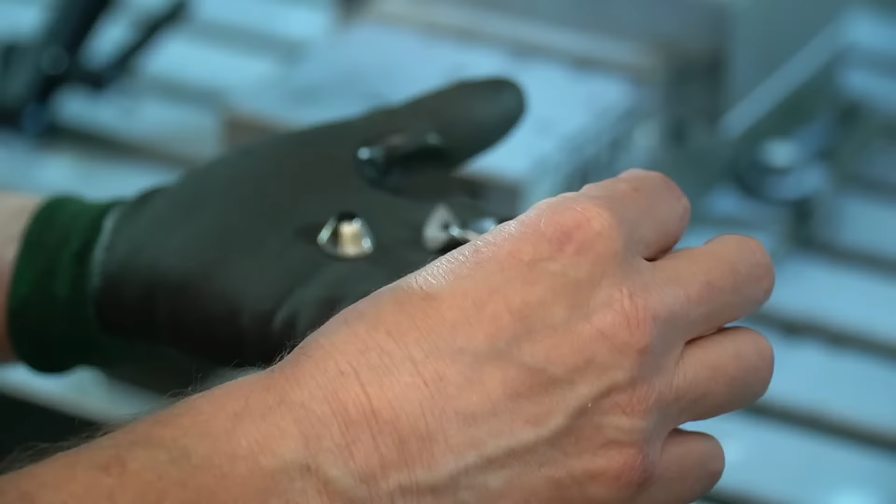So I can tell this is the chip that came off of the 3-inch 90-degree face mill. We've got nice commas coming off of there. That's a little bit hot.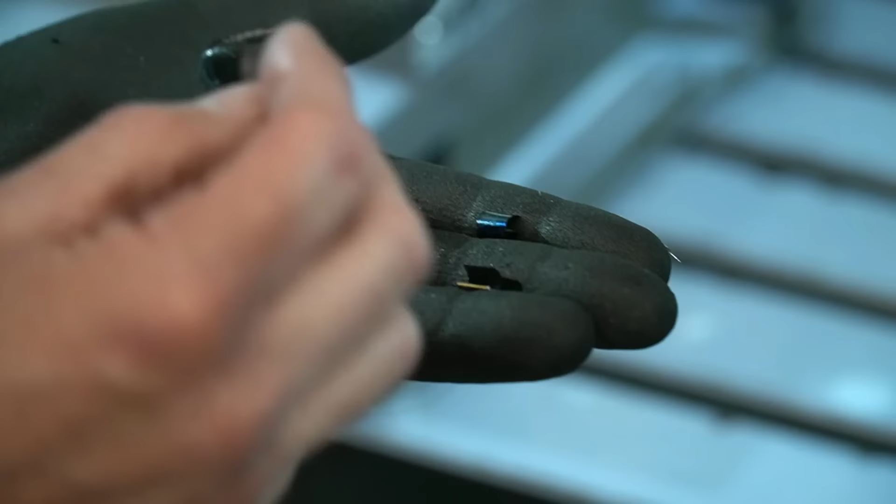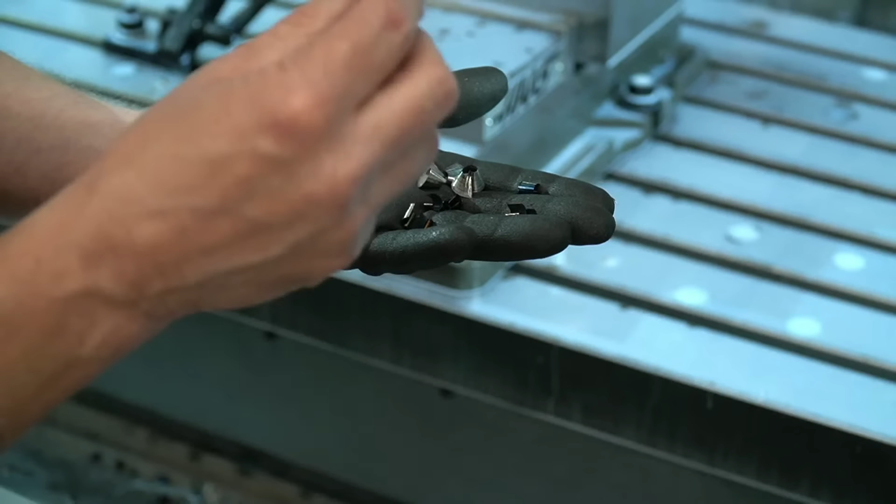And then here's chips from that drill. Those were obviously easy to come by - those came out really, really nice. Obviously they're not blue colored because there was coolant, through spindle coolant, being used on those. We got really good chip breakage here. These things were cutting right, just perfect.

Okay, and then once again, the way you program these, you want to go through the torque charts real quickly? Yeah, let me bring up real fast the recorded data. You can come out, Tyler.

Here were the recorded spindle loads of that cutter. We took that 4-inch face mill going 220 thousandths deep and 3 inches width of cut, and we pulled 116% as a maximum spindle load while that tool was in the cut. The second cutter, the 3-inch 90 degree, did 96% spindle load, and then that drill pulled 78% spindle load.

We did the torque charts for this particular machine, and you can see it's a little busy, but we're really paying attention to the torque in low gear. None of the tools ran above the just-under-3,000 RPM shift point, so all these tools ran in low gear, and that was 200% spindle load.

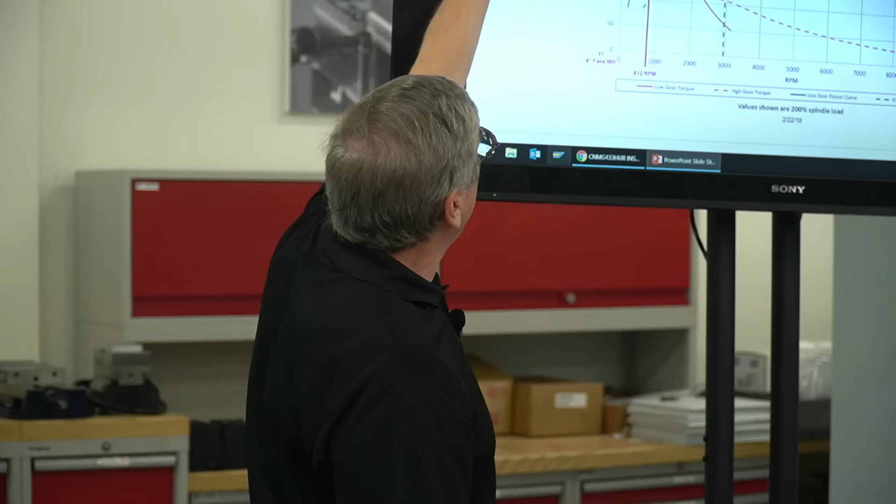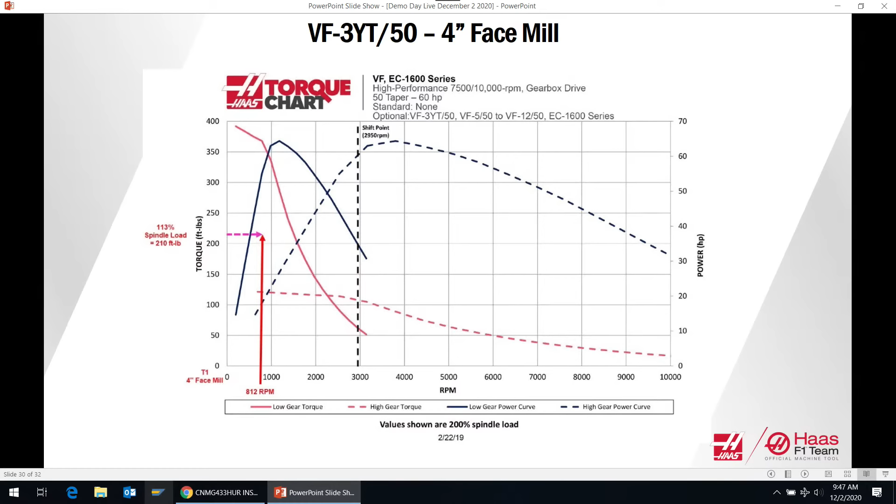Our cut here ran at 812 RPM, so I gotta find the right RPM. My percentage was 116%, but when I made this chart it was 113%. So I took the 113% spindle load, divided it by 200, the maximum available, and got a conversion factor, then multiplied that by the amount of torque at 812 RPM, which gives me a calculation of 210 foot-pounds of torque that tool pulled. You can see just over 110% on the spindle, 113%.

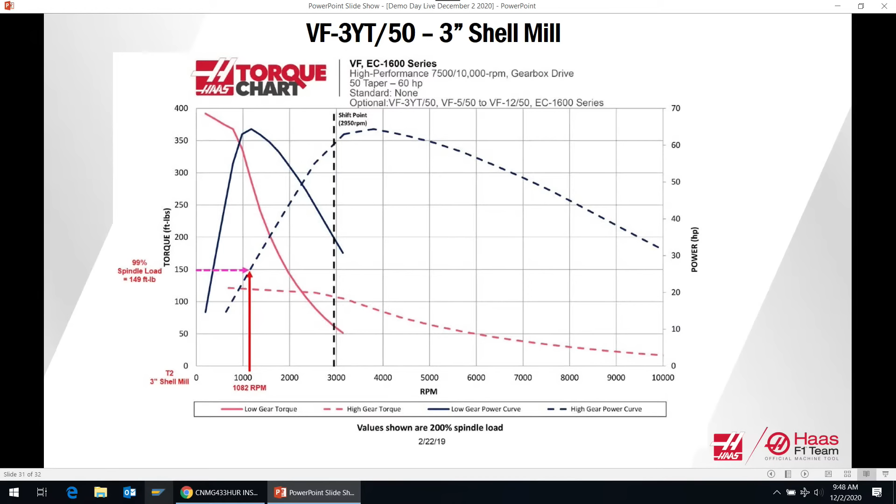The next tool, the 3-inch shell mill, ran at 1,082 RPM, so that's why our line is over here at that RPM, and you can see our torque is dropping pretty dramatically. So I'm somewhere in the 290, 280 foot-pounds of torque at that RPM, and my spindle load ended up being 149 foot-pounds for that tool, which again came in right at 100%, 99% spindle load. So I was at half of the available maximum torque at that RPM.

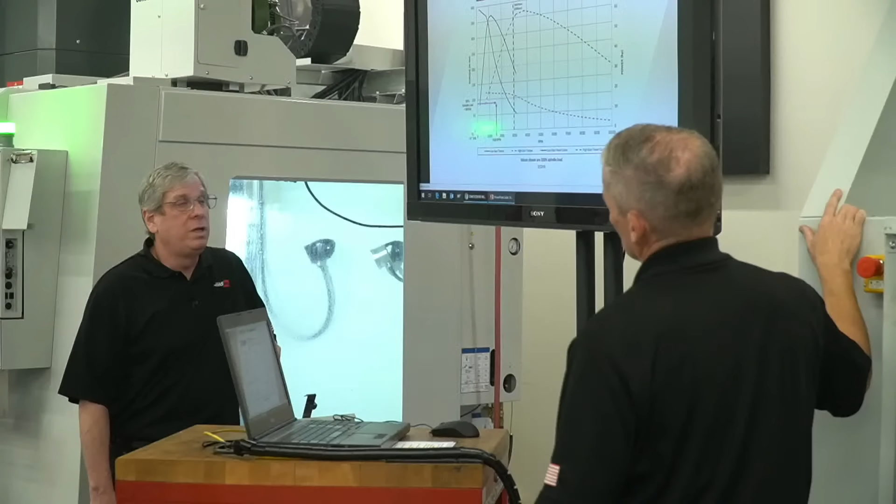The last tool, the 1.5-inch drill, was running at 1,528 RPM. Now we have quite a bit less torque down there, we're down about 200 foot-pounds for this calculation. Again, the 80% spindle load divided by 200 possible percent spindle load gives me a conversion factor that I multiply by the torque at that RPM, and I ended up pulling about 80 foot-pounds of torque with that tool.

I think that's going to just about wrap it up. Yeah, I'm going to come in here. We'll wrap it up with John.

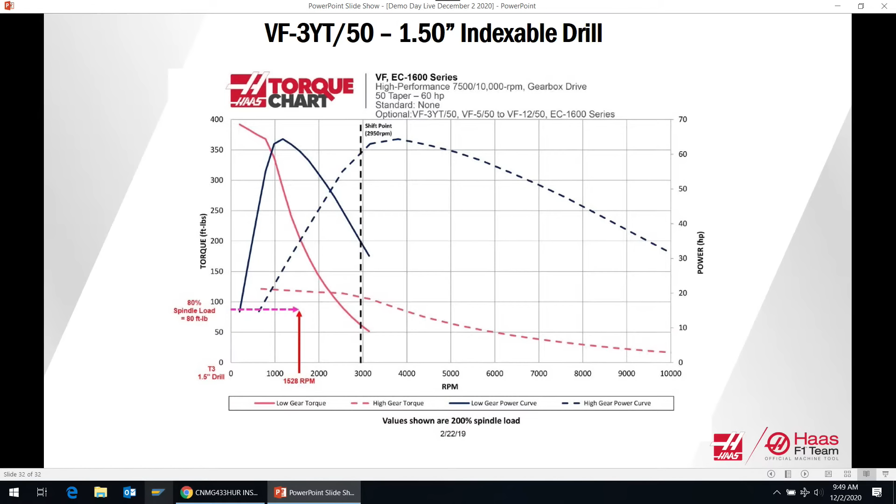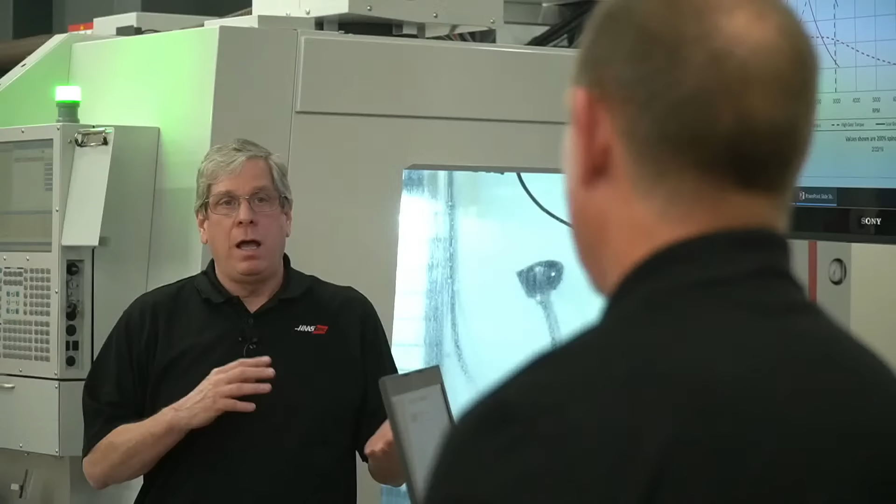One of the things the three of us talked about yesterday, we had some fun with it: some of the people on YouTube who post comments saying they've got a Haas machine and they can't cut steel. We have the contingency in place to help those people.

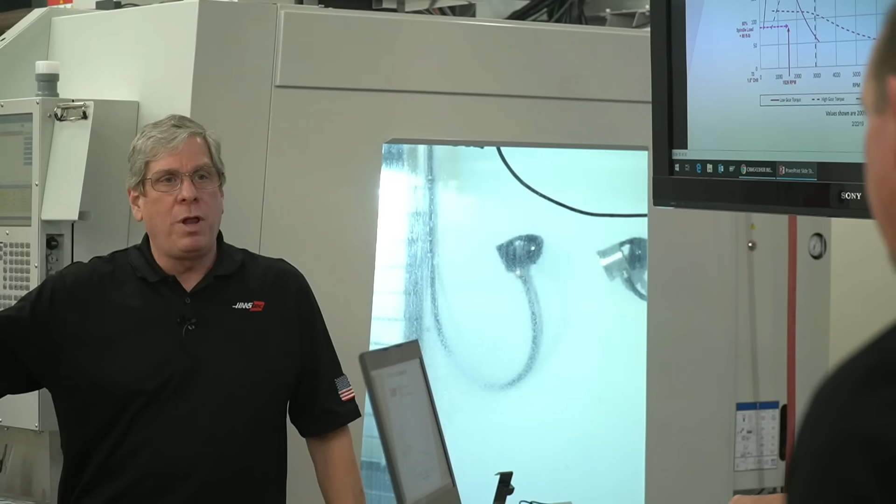It's not so much comments on YouTube as it is the blogs, machinist blog sites, where people ask a question about their Haas machine and somebody responds who isn't even a Haas customer, giving advice based on their own machine. I think, why doesn't this person just contact their local Haas factory outlet or the Haas factory to get expert advice? We're the ones who run these machines all day long, we know most about these machines. Don't ask somebody on the internet you don't know who may or may not be giving you good information on purpose—they might be leading you down the wrong path. Who knows what's going on the internet? It's really important that you contact us because we're here to help you.

Again, I've always said that at Haas Automation customer service, we consider ourselves a world-class customer service organization. We're here to help our customers get the most out of their machine tools. I think that's a great conclusion, I couldn't have said it better myself.